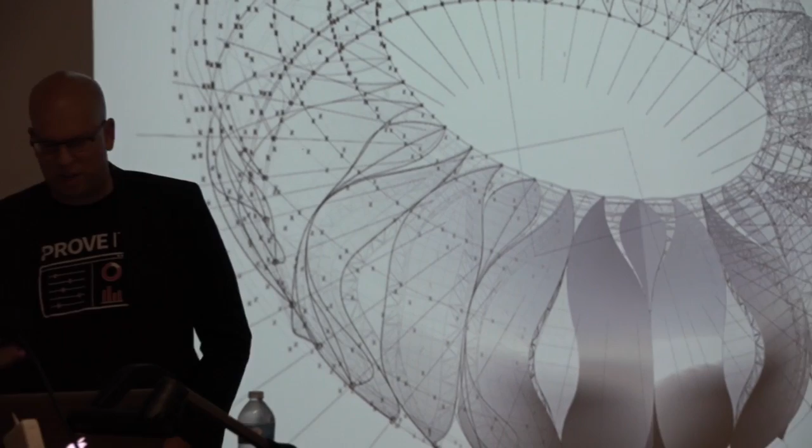I always liked the computer from a rendering perspective. As Nathan alluded to, this idea of being more efficient as a designer was something I was always kind of interested in. I used the computer as a tool to help me think through design. This project started to shift my thinking a little bit and started to look at different aspects of technology as it relates to design.

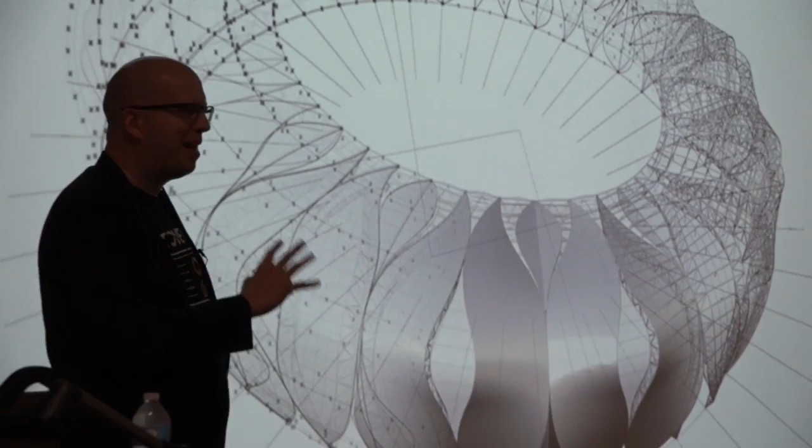This is the Hangzhou Stadium. It was done while I was at NBBJ. A little background on this one. Nathan mentioned I was heavily involved in a lot of competitions while in Los Angeles. This one, I like to joke, was an accident. This wasn't meant to be one of the stories that I would think about telling 5 years later.

There was a slow period in the Los Angeles office. There were about 2 weeks where I was free. There wasn't a lot of work. We're waiting for new projects to start up, and there's this competition that came in the door. They were on the fence on taking it or not for an 80,000 seat stadium in Hangzhou, China. And they're like, oh well, Nate's available. Let's put him on it.

And there were a couple of other folks that kind of teamed up on this thing as well. We put our heads together for about 2 weeks, generated some schemes. The partner architect we were working with in China flew over. She sat right next to me, which was very kind of annoying. I'm sitting there trying to model some stuff, and she's like right here. What are you making?

And sure enough, we come up with this scheme of this kind of replicating, kind of petal-like geometry. It wasn't really ever meant to be sort of flowery in metaphor. It just happened to be an interesting pattern that we were working with at that time. And the team became very enamored by it. We're like, okay, let's submit this and see what happens. It ends up winning and moving forward.

And it placed me as a 1 year out of school designer in the role of sort of this lead design on an 80,000 seat project in China, because at a certain point, the question then became, how are we actually going to do this? And part of the logic and the underlying technology that allowed us to generate it became, in many ways, the driver and the main production engine for how we were going to deliver it.

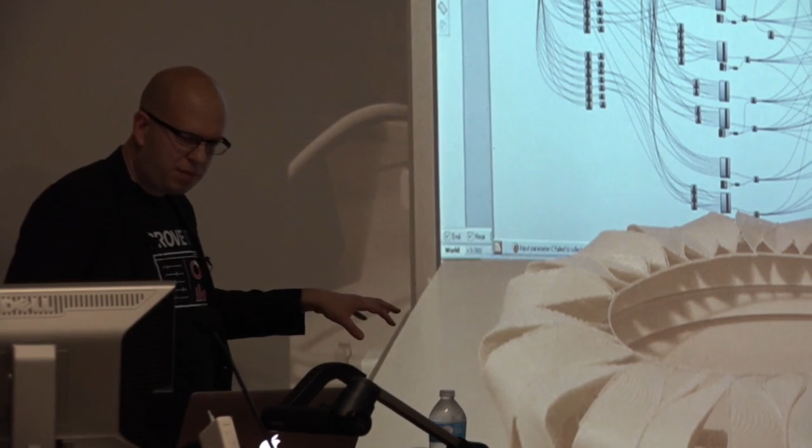This is Grasshopper. This is like one of the very, very early versions of Grasshopper. Any students using Grasshopper in this group? You guys have it easy. This was tough. You could only really do anything sophisticated if you were going to start to script with it. It was very challenging to get anything to happen out of this software unless you were actually going to start digging into the code. So it started to force me to learn programming at the same time.

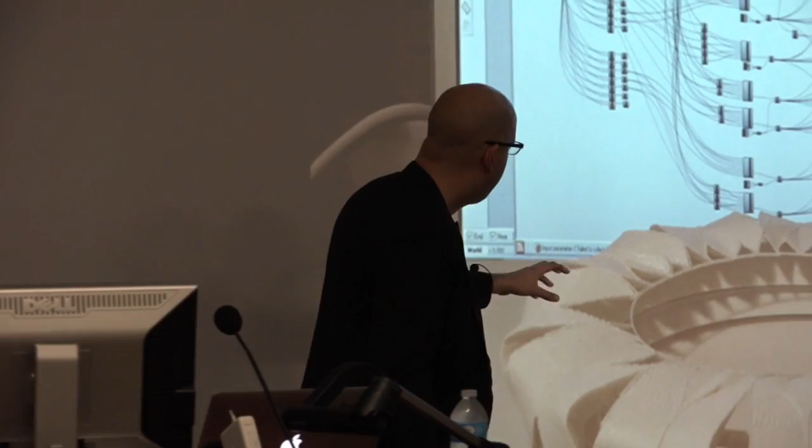But I became very fascinated by what it meant to start to think about not only this, aesthetics, experience, but also think about this, process, algorithm, computation in parallel. There's also something very interesting happening under the hood that really wasn't exposed in any kind of direct way through the computer screen. And that was this very messy process of how, in this case, 3 collaborators were working together. Local architect in China, their structural engineer, and NBBJ as the international design team.

Everything in between this kind of mess of spaghetti represents the data workflow that was occurring under the hood that allowed this team to collaborate. You had file formats being transferred between different participants. You had data connections starting to emerge between the structural engineer and the main design algorithm. You have connections between AutoCAD and Revit occurring that's allowing the documentation process to happen.

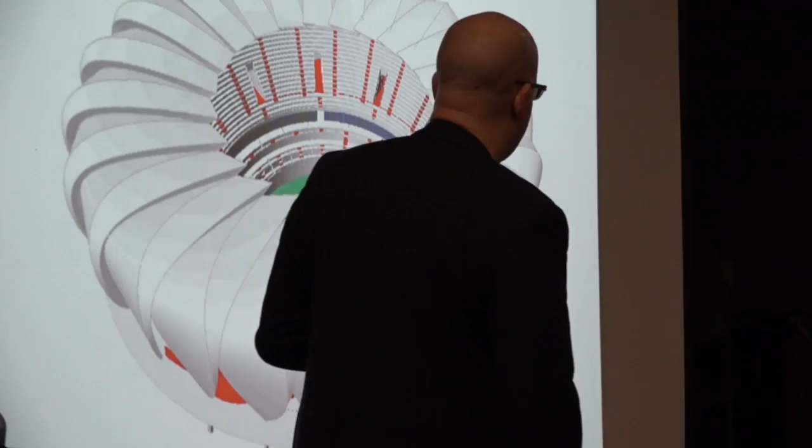This story started to shift my path a little bit in the firm. I started becoming perhaps less a traditional designer, and started to look at other systems, other ways with which we could start to take what was done on one project and apply it to many. This is a demo reel of various computational tools that were built over the span of 2 years following that particular project. You have algorithms that are looking at form.

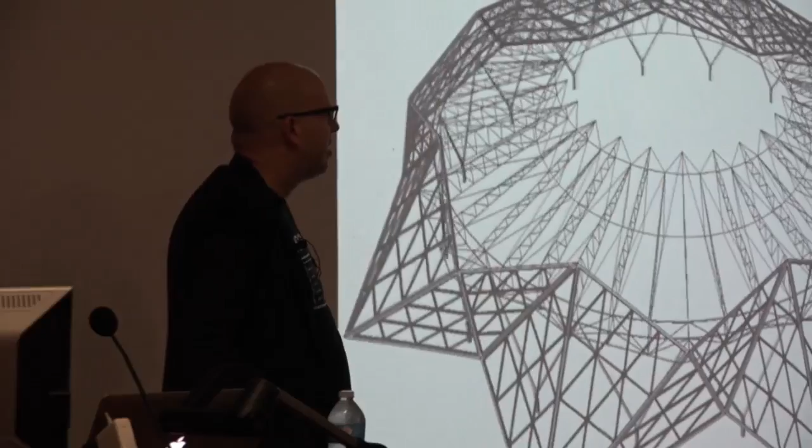You have analytical algorithms that are looking at sightline quality in stadiums, tools for rapid massing studies within very fast-paced master planning projects, circulation tools, programming tools, getting into the structural side of things. These start to paint a story of how the story of a project doesn't necessarily need to be a one-off thing.

We can start to think about design processes as being rapidly deployable tools that can help us begin to think through problems, design challenges, and things that we're seeing on a day-to-day basis in a different way, and capitalize on those efficiencies as we go. Where it's less about reinventing the wheel every single time.

That's the one thing, in addition to the quote I had at the beginning, "because that's the way we've always done it." The other thing that I really dislike is the idea of, well, every building's a one-off, so therefore our process is always going to be a one-off. That's absolutely false.

So that brings me to Proving Ground. There's a whole chapter in there where I was at Case. I went to the dark side and became a consultant, working in the world of building information modeling and technology and algorithms. Within the last year, I have started up my own venture, which is Proving Ground. And our aim is to bring together a couple of ideas.

There's this idea of working with architects, designers, engineers, and manufacturers to be strategic with their thinking about data and technology and workflow, working at that 30,000-foot view on what it means to operate as an organization within our industry today relative to these new trends that we're seeing. And then there's an aspect of what we do which is about solutions, making solutions for clients, building tools, building algorithms, and building components that can make that strategy actionable.

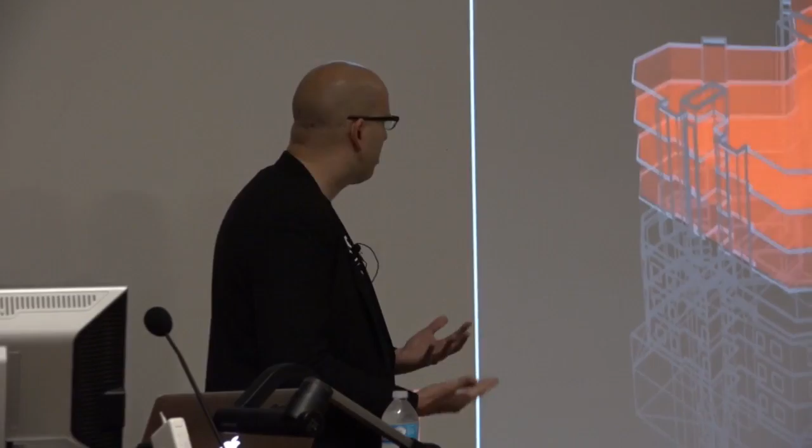Very different data set. This is energy modeling. This is an early stage analysis of a hospital by Centura Health. This was done with HDR, very quick study, looking at what it would mean to add on 3 new zones to the hospital. And not only are we looking at it in 3D, but interfaces like this allow for a degree of interaction to occur between what we're seeing as built form or proposed built form, and then the underlying performance of that built form represented through an interactive dashboard.

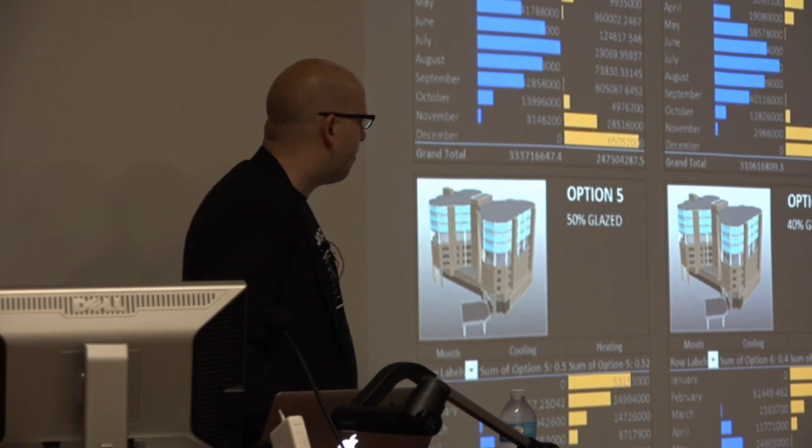I've grown to appreciate the pie chart as much as the kind of 3-dimensional view of a building. When they begin to operate with each other, they start to provide us with a different type of way of working, where our decisions and the way we work can have this feedback with underlying performance factors.

This is a 3-dimensional model. This is Rhino. You're seeing a mouse interacting with floor plates, slicing up a building, assigning it to different layers. Everything that you would normally do as a designer happening in a very intuitive way, but then overlaid on top of this an interactive dashboard that's giving you rapid feedback about cost, about programmatic mix, ratios, sections and elevations occurring simultaneously as you're working.

Think about the waste that goes into developing a building scheme, only to then have this auxiliary process where you're actually going through and clicking on floors and adding things up. This is providing you not only with that, but much more insight into the process as you're working.

So for us to be able to deliver on this type of vision, to seed businesses with this way of thinking that goes beyond a project here or a project there, we have very specific things that we do with clients and also recommend. And when I say clients, I mean other architects. I mean other engineers. I don't necessarily mean building owners, although we have done some work with owners.

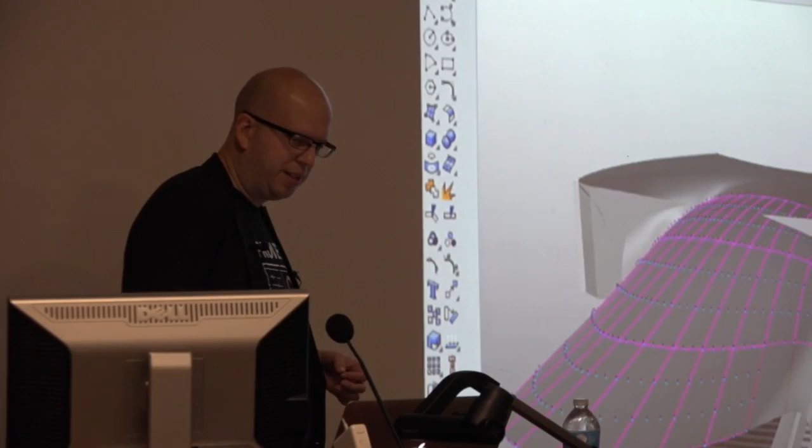This is a project, I can't talk about the specifics of it, but this was something that we were involved in, involved a grand stair. You can start to see that there was a paneling system designed and developed that kind of wrapped this grand stair, all in Rhino. Rhino is a very good tool for dealing with that sculptural geometry and building it up.

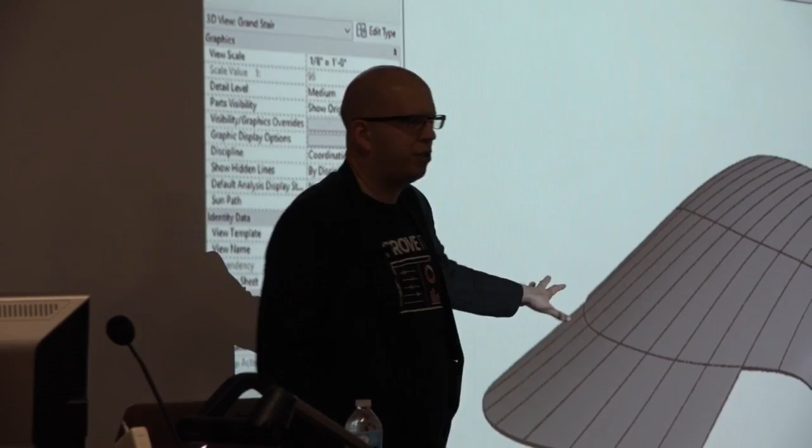The workflow here was about how can we actually begin to take that design geometry and make it reusable within a building information platform. So we're taking that data, taking the underlying point relationships, and instead of telling the designer, okay, now go rebuild it inside of Revit, automate its construction. Make it so that you can actually use that information to drive the next step of your documentation process and production process.

And it doesn't stop there. This can go well downstream. This is a project and a prototype we built for Ceilings Plus. They're manufacturers. They do acoustic ceiling panels. They're working with Zaha Hadid, UN Studio, a lot of complex stuff. We wanted to take the same set of principles and design the pipeline that would allow design geometry to connect right into a production system like Autodesk Inventor.

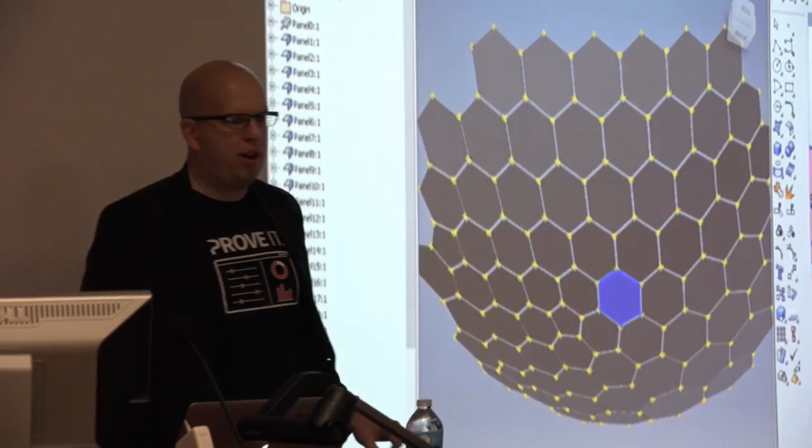So you're seeing the automated rebuild of design geometry as bent sheet metal inside of Autodesk Inventor, such that they can then feed that right downstream into their shop floor. A lot of waste is typically packed away in this, which opens the question of, if we're going to rethink the workflow, are we not also rethinking the supply chain? And I think that's one of the things that we're going to see very, very soon, if we're not seeing it already, is the push of what data-driven really means for the supply chain of design to manufacturing.

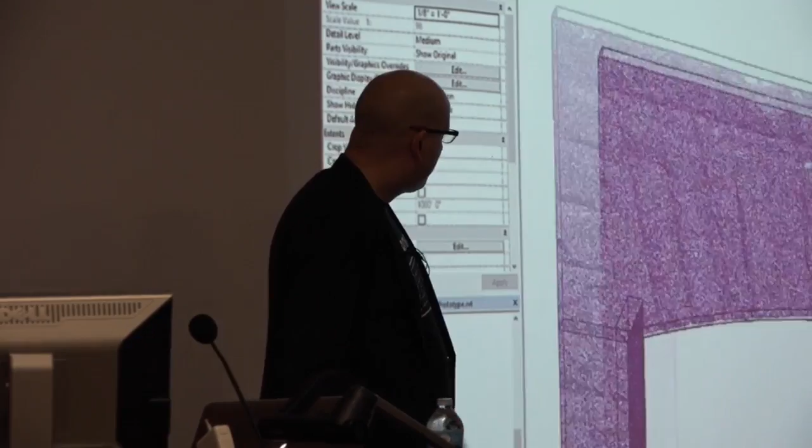This is a little bit different. This is a workflow that looks at existing conditions, and not only taking existing conditions, but linking them into a building information model in a novel way. Point clouds are really interesting. They provide a high level of accuracy to the idea of capturing existing conditions, but they're pretty unwieldy when it comes to actually producing usable geometry inside a BIM.

So what you're seeing here is a custom interface that allows us to rapidly consume point clouds inside of Revit, but you're also seeing a process with which we're taking the point clouds and constructing features for a historic restoration project, wherein we can identify every single brick that's captured in this point cloud. We can assign it an identifier. We can assign it an ID, load up different resolutions of each feature on the fly within Revit so the design team can start to work with it.

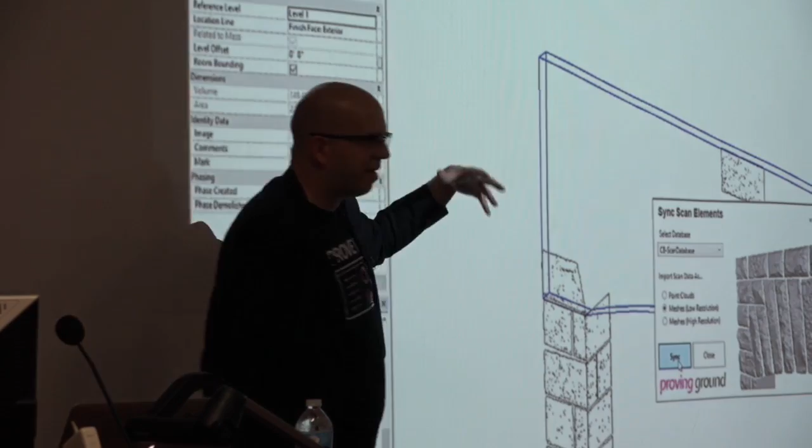So something as flat and as heavy as a point cloud can become a key part of the building information strategy. So you're starting to see the buildup of this with every element inside of Revit clicked, right? These walls are abstracted versions of what actually is an assembly of things. We're loading that on the fly from a custom database.

I was at Chichen Itza 2 years ago, anyone been to Chichen Itza? Yeah? Amazing. The tour guide took us by this pile of bricks sitting off the side. He's like, oh yeah, you see those chalk lines over there? That's how we're indexing all these bricks and going through this restoration process. I'm like, oh, I could solve this. I could fix this problem. That's kind of what we're after here. Intelligent ways of dealing with these ideas, because they are going to disassemble this building and eventually put it back together. So how are they going to do that?

We make tools. Part of a lot of what you're seeing is leveraging tools as they exist on your desktop. Revit, AutoCAD, Microsoft Excel, Office 365. People ask me what my favorite design tool is. I say Office 365. People look at me really weird when I answer them with that. But built on top of this is this idea of making something, making tools, making workflows.

In many ways, Proving Ground is a very specialized software development arm. I'm not a programmer by training, but I would say that 80% of what I do is write code now, write software that deals with these building problems. I'm also interested in software development and tool making from the standpoint of process.

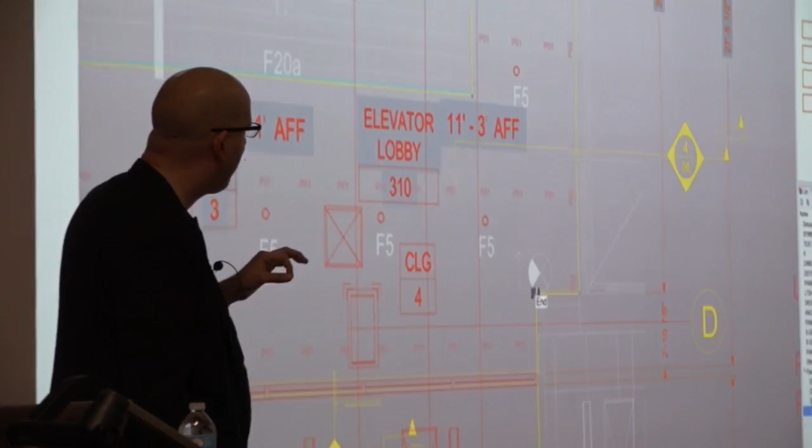Ceilings Plus, kind of hinted at this a little bit. We not only did some strategic work, we also did some tool making with them. This is a set of tools that looks at their shop drawing process. They're 100% AutoCAD, sitting there drafting up lines, pulling in their details. They engaged us because not only is the work coming in faster than they can do it, they're also dealing with much more complex problems than they've ever had to deal with. So this has required them to think about change in their organization such that manual process, wasted effort, repeatable things can actually become resolved.

So we started building tools. This is using a combination of Grasshopper, Rhino, custom scripting, and a cool plugin called Human UI. Andrew Heumann made this thing, he's an NBBJ colleague. Something that would take them a couple of days is now being collapsed into a couple of minutes or a couple of hours, because we're able to go in, map out their workflow with them, think through what it meant for a design to come in and what it meant for them to actually produce shop drawings, identify areas of waste, and then start building tools around things that could be adopted.

They worked on a huge Gensler project recently, and one of the outcomes of this, they actually did the calculation of what it meant for them to do what they would have done before and how they were doing it now. We saw a 40% reduction in time needed to actually execute the entire shop drawing process because of these targeted uses of technology in their business.

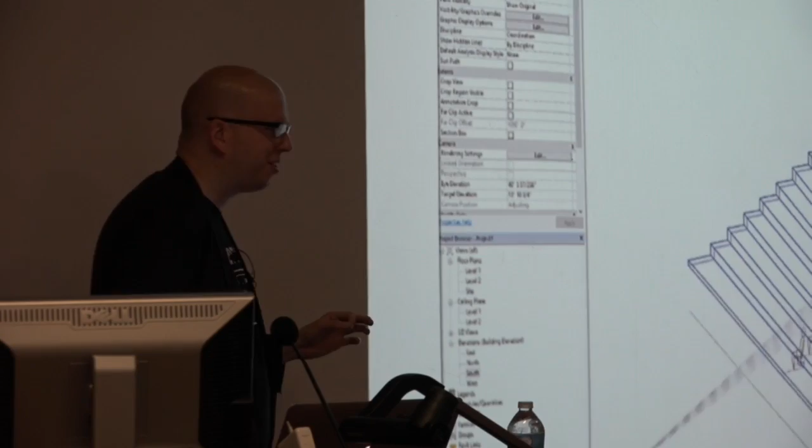I'm no stranger to building sightline tools. It was one of the very first parametric tools I built when I was kind of a designer and really starting to get into stuff. But we've taken it to a whole other level.

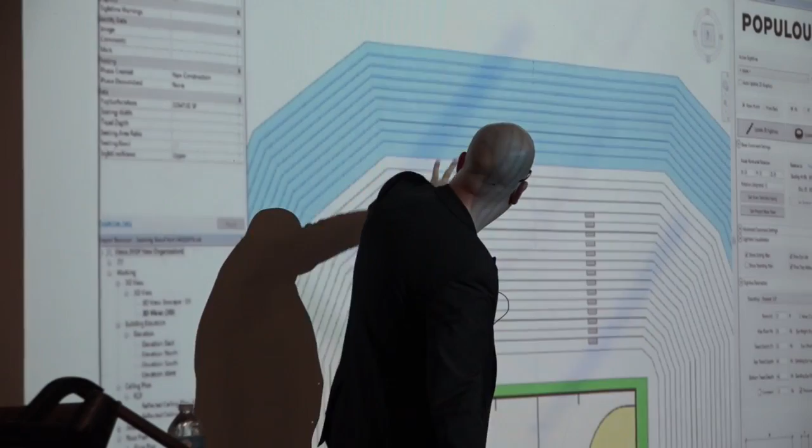Not only are we doing it 100% in Revit, but we're also marrying up 2D and 3D such that it becomes very easy now to begin to update a design and take it through documentation. Even down to things - this was a huge technical challenge - I don't know if you've ever placed stairs on a sloping building before. That thing was hard.

Placing voms, automating that kind of placement, building intelligent content that would allow them to cycle through variations in that content and have very clean modeling as a result. It's all part of this toolkit. And then my favorite piece is coming up right here. I'm not even going to say anything.

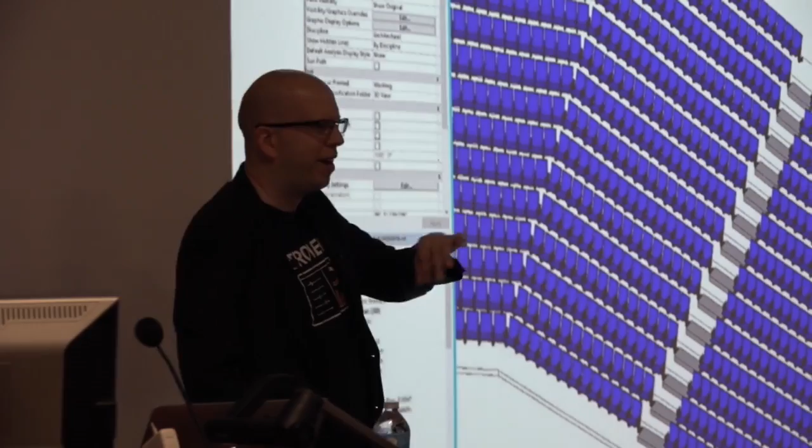Every seat placed at the correct setback from these aisles, schedulable, quantifiable. You can swap them out with different types, and it tracks that relationship. If we go back all the way to that initial sightline, we can actually see that change populate its way the entire way through this sort of supply chain. I love the seat tool.

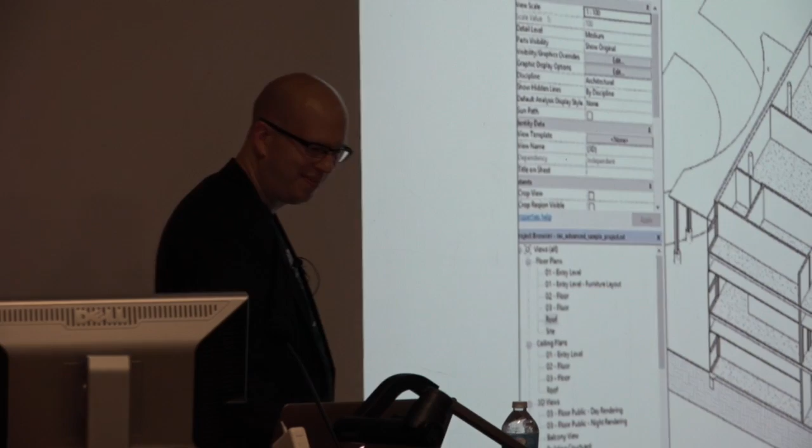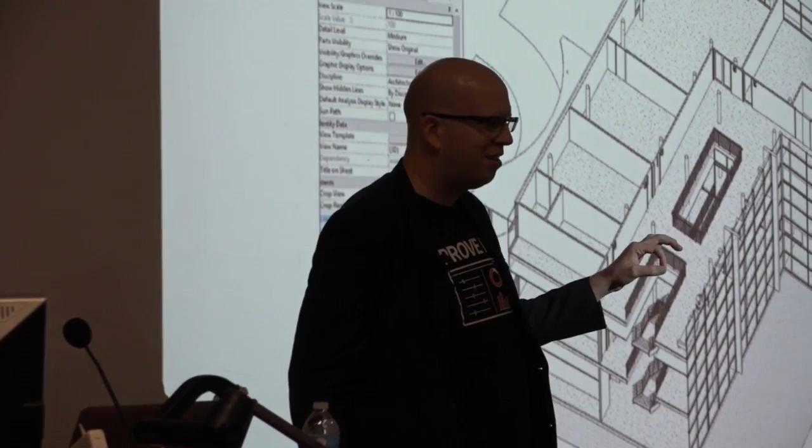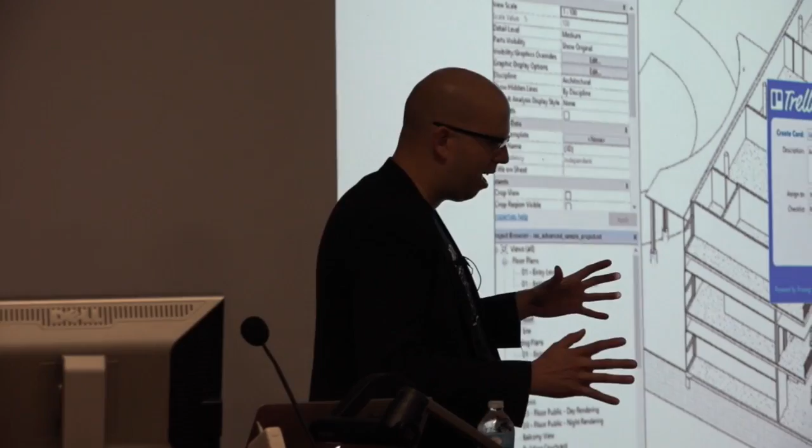Project management software - I never thought I'd build a piece of project management software before, but I happen to. I'm going to make a recommendation to anyone in this room that's trying to keep all their tasks straight: I highly recommend checking out Trello. It's a free service online, task management software. You can do anything from your grocery list to very complex projects and track multiple team members and what they're doing. Very popular in the world of software development.

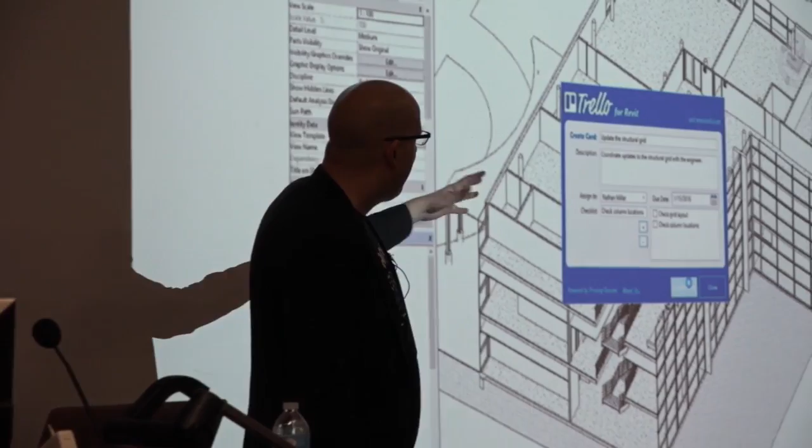We have built an app that ties it right into where the work is being done, such that as you're doing tasks, as you're building up your model in 3D, either it's Rhino or Revit, it can sit in both. We've got a Navisworks and an Inventor version of this popping up. Still very early stages in some ways. But you can start to say, hey, I see a modeling issue, or hey, I see something that needs to get done. Let's create a card, set a due date, assign who's going to do it, and then push it out to a database that we can track with others.

We can actually start to then see how these tasks begin to populate what is essentially a cloud-based tracking system of that stuff. It's all ending up in the cloud, and we can start to make sense of it to inform next steps on the process.

Everything that I'm talking about also relies on people.

It's interesting to me where we exist at a point in an industry where the folks that are running businesses have very little idea how the work is actually getting done. There's a disconnect, there's a widening gap. Given the pace of technological change in our industry right now, there is a widening gap between what new students, what new professionals are going to be bringing to the table, and what owners of businesses understand and know regularly.